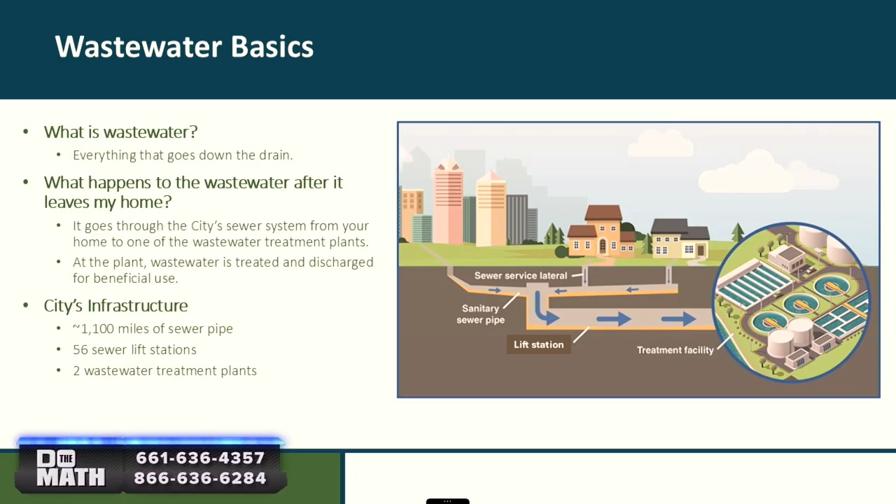All right, so let's go ahead and take a look through them. So understanding the city's sewer system, quick overview just of everything that we do. So as we mentioned, usually people don't think about anything once they use the toilet. So starting off, what is wastewater? Wastewater is everything that makes its way down the drain. So if you brush your teeth, wash some dishes, shower, use the toilet, do a load of laundry, absolutely everything is wastewater. Makes its way down the drain.

So what happens after you do any of those things in your home? We have a sewer collection system. It's a system of pipes underneath our streets that we really don't think about. The City of Bakersfield has over 1,100 miles of sewer pipe. All of that makes up our collection sewer system. So you flush your toilet, it makes its way into the collection sewer system. We try to have wastewater flow by gravity. It's a large volume, it's the easiest thing to do.

Easiest thing, flow by gravity, but eventually it gets to a low point. Every part where it gets to a low point, we have a lift station. Pumps it up to an elevation that once again, it can flow by gravity to the next low point. Wastewater keeps doing this, lift station, high point, low point, all the way until it makes it to one of two treatment plants that the city has. So the city has 1,100 miles of sewer pipe, 56 sewer lift stations, 2 wastewater treatment plants.

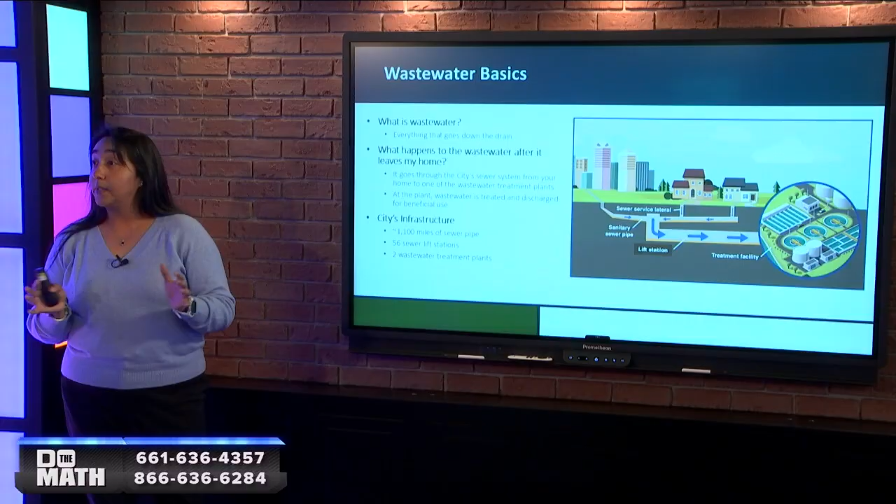One thing to note, it's wastewater, but we also deal with stormwater. Some cities have combined systems where wastewater and stormwater make its way down the same pipes to the same locations. We do not have that. So in addition to the 1,100 miles of sewer pipe, we also have about 1,000 miles of storm drain pipe. And people might get confused about that because we don't have storms here in Kern County a lot, but it's always water runoff. Yes, so we also have that system to look after, but again, we have them separate.

So looking into wastewater basics, what is wastewater treatment? We typically look at two components, the flow, the liquid portion, and the organics or the solids. Treatment in our facilities have a primary, secondary, and tertiary treatment. Primary is basically we're trying to get rid of all, the first step is screenings. There's a lot of things that make its way down the drain that really don't belong there. Plastic products, flushable wipes that really are not flushable.

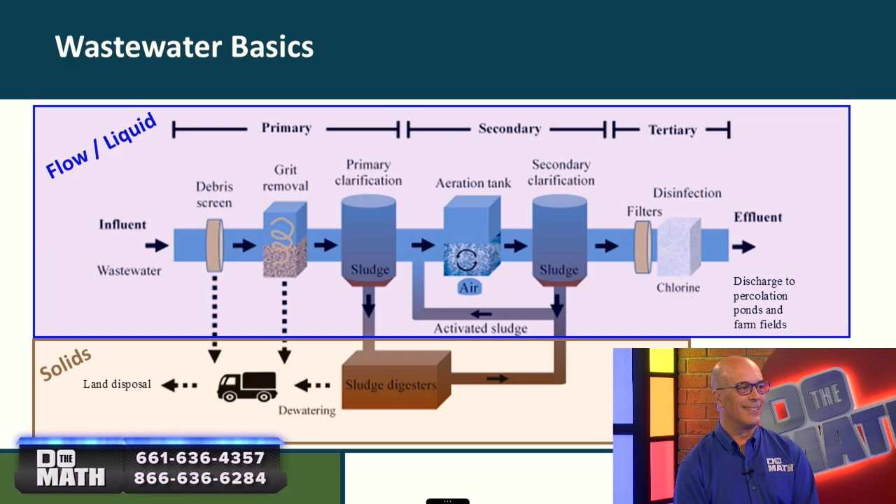Right, and they say on the package, please do not flush, and a lot of businesses also state that. Exactly, and then there's some other random things that make their way down into the storm drains, more through the manholes, but we get tires or blankets or large toys. All of those items we need to get out. Kids have fun when they discover the toilet and drains and what can go down there. Yeah, so all of that we try to screen out at the beginning so it doesn't damage the equipment downstream. Then we go into grit removal. That's more of like eggshells or pieces of sand that make their way.

Can see that on the flow chart that you've got there. Yes. And then we have primary clarification.

This is the first step where we're getting rid of some of the organics that do belong in the system, but they're organics, they're solids, and we are trying to remove them.

From there, aeration tank. This is part of our secondary treatment. It's where we start doing the biological treatment.

Into the secondary clarification tank. So all of the steps really are just, we're trying to separate the solids and the liquids at every step, and increasingly more so. Our tertiary treatment is a final filtration step.

And then there's disinfection. So once it goes through the tertiary treatment, we have now produced reclaimed water, or purple pipes, so it can be used to irrigate landscape at that point.

If we just stop at the secondary, which some of our processes do, it's used to percolate back into the groundwater or for agricultural irrigation. So different types of use.

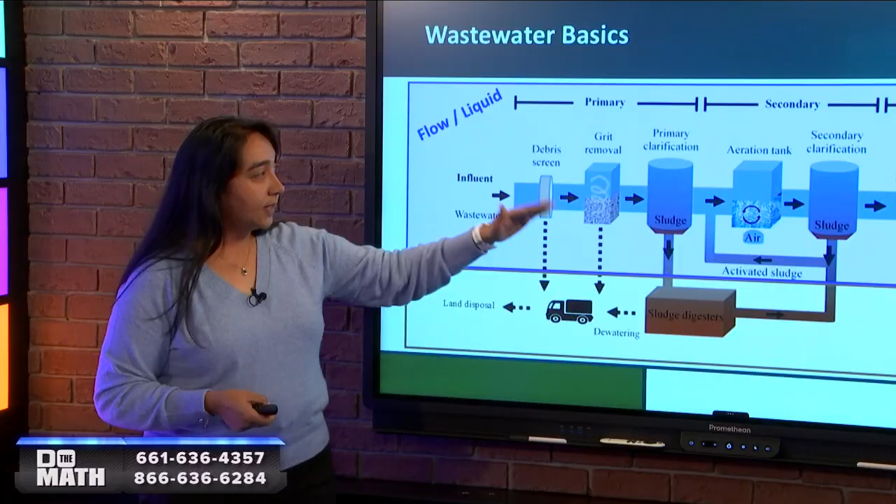And then as we mentioned, the solids - every step we try to separate them out. Our solids go into sludge digesters, which are basically huge concrete structures that get heated up to 100 degrees Fahrenheit and get digested for about 15 to 21 days.

The end product kind of looks like fertilizer at the end, and then it's land applied to city-owned farm fields.

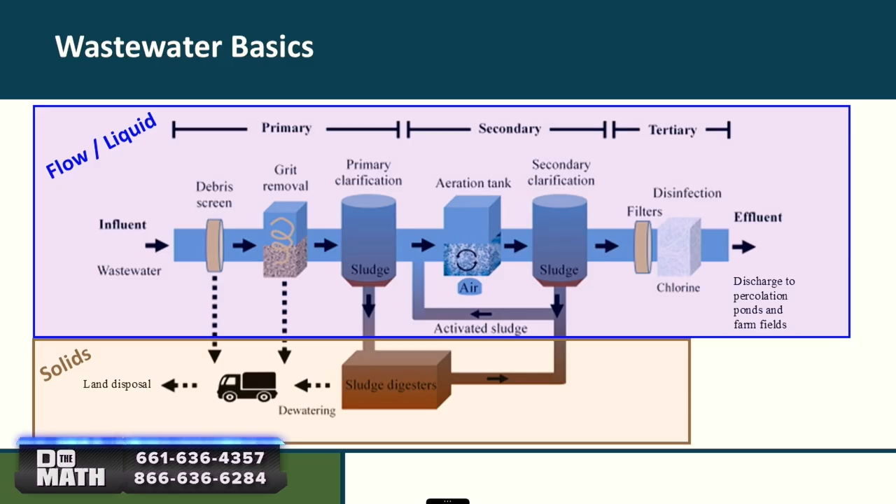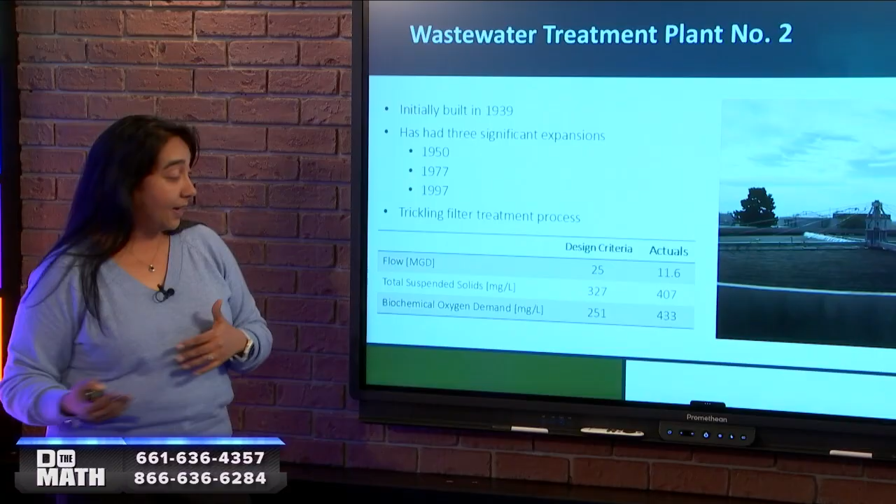Here we're comparing the design criteria, so we try to keep track of the liquid and the organics, or the solids. Flow is designed for 25 MGD, million gallons per day. If you want to visualize that, 1 million gallons of water - picture yourself in the middle of a football field.

Picture that football field with 2.5 feet of water - that is 1 million gallons. And we've got 25 able to go through.

Suspended solids - it was designed for 327 milligrams per liter. Biochemical oxygen demand, 251.

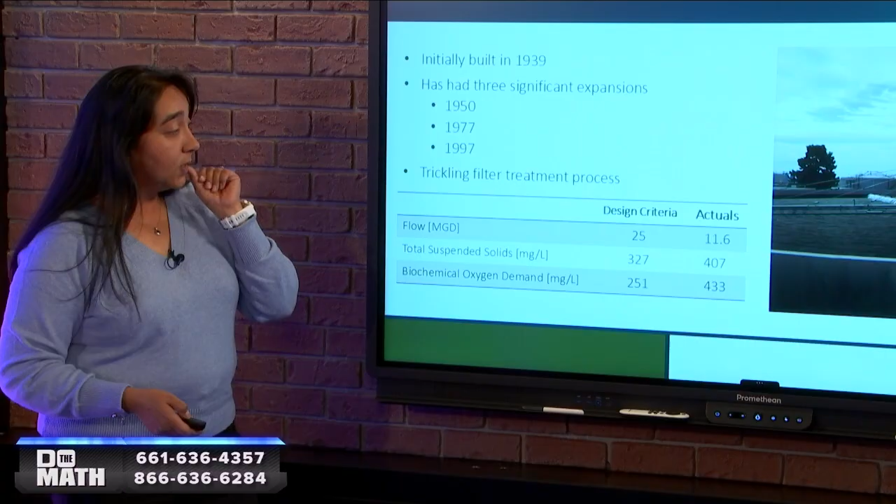Our actuals, we're doing pretty good on flow, but our organics, our solids loading, it's higher than it was designed for. That's part of why things need to be fixed and updated.

We can see if we take a look at the dates when they had expansions, it's been quite a while since the last one. And it usually takes a while between when a technology is developed and when it's implemented.

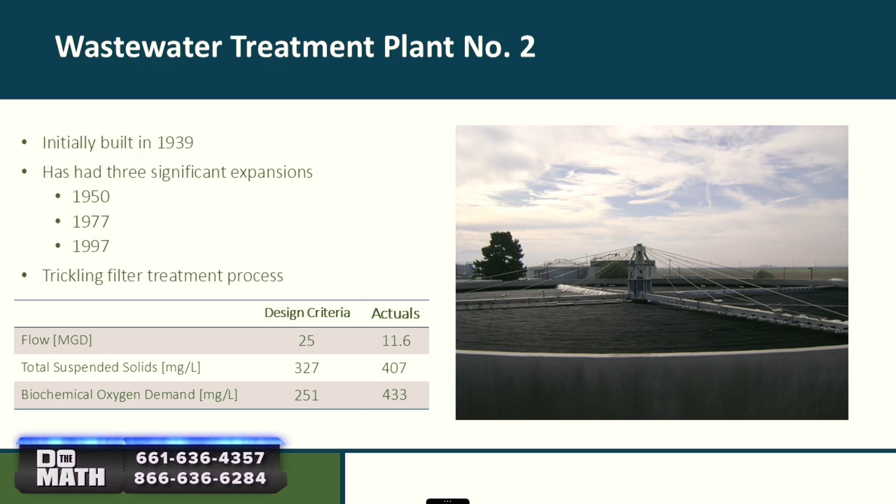So trickling filters were really a high point around the 70s. But as you can see, we went ahead and introduced it in '97, so it was already a little bit behind.

I don't know, you've got this magic touch, Evette. Every time you hit that, we go back in time a little. Is it the touchscreen? Oh my gosh, okay, that's what it is.

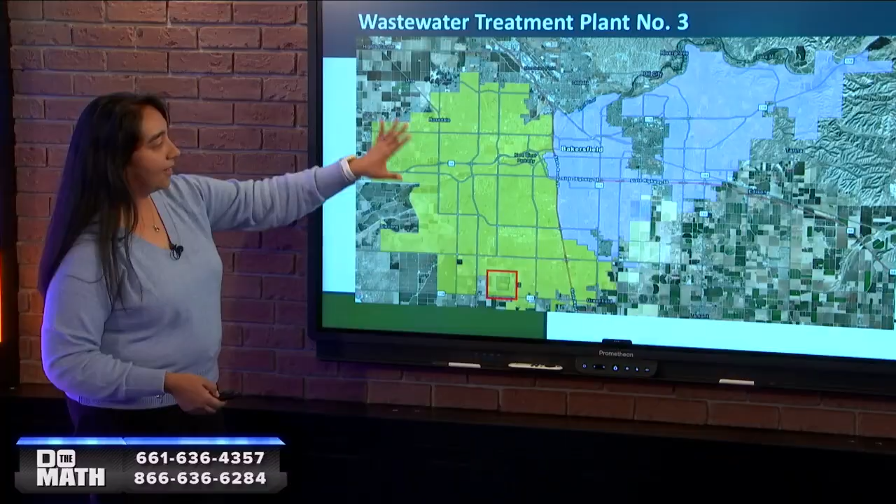So everything flows through. Going on to Plant 3, again this is our service area. Plant 3 is everything on basically the west side of the 99. A little different story with Plant 3.

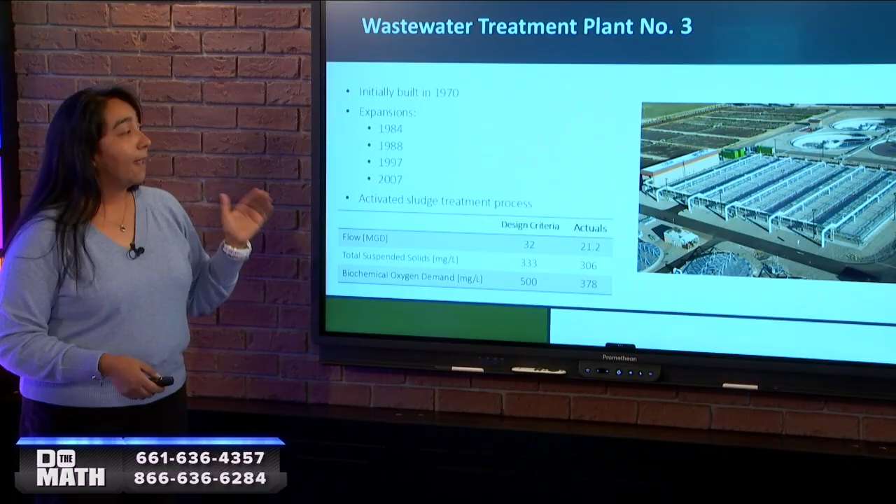It was built in 1970, has had 4 major expansions, the last one being in 2007. Here we have an activated sludge treatment process, so a lot newer technology compared to Plant 2.

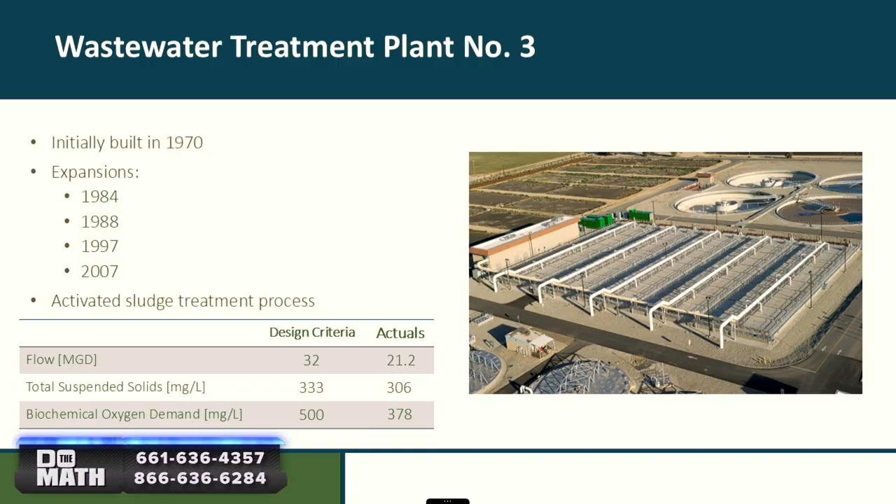You see the design criteria, it's a little larger - 32 MGD with 333 total suspended solids concentration, 500 BOD. So our actuals were pretty good on the solids, but here a different story.

It's the flow that's a bit of a concern. We're at 21.2, which is roughly about 66% of the design capacity.

Once we hit 70% of capacity, we need to really look at an expansion. You don't want to get it past that because that's when problems start happening more.

Okay, and then just a final look. This is a much larger footprint than our Plant 2. You can see this is just the first half of the treatment process, it didn't all really fit into one photo. So that really is sort of a summary of what is wastewater in our treatment process for the City of Bakersfield. Fascinating because a lot of that stuff is going on, and I know it's been in the news pretty recently.

So anyway, Evette, I know that you would love to do a lot of the math problems that go along with that, but I know you brought a colleague in. We're going to have him do some of those to spread the fun a little bit later on. But Evette, thank you for coming in. Thank you so much. We'll be back with more right after this.

In studio, we have Aaron with us, and he's with the Water District also. Thank you for coming on today. Thank you for having me. So what is your role with the Water District? I am the wastewater treatment superintendent, and I'm pretty much in charge of making sure that both of the city's wastewater treatment plants are treating and cleaning the water so that it goes back into the environment.

So Evette talked to us a little bit about that whole process, where they are, what kind of things go into wastewater, what they do with it, how it's treated. But you're the one that makes sure that it all gets done. Correct. And how long have you been doing this? So I've been a wastewater superintendent for almost 3 years, and I've been in wastewater for about 11 or 12 years.

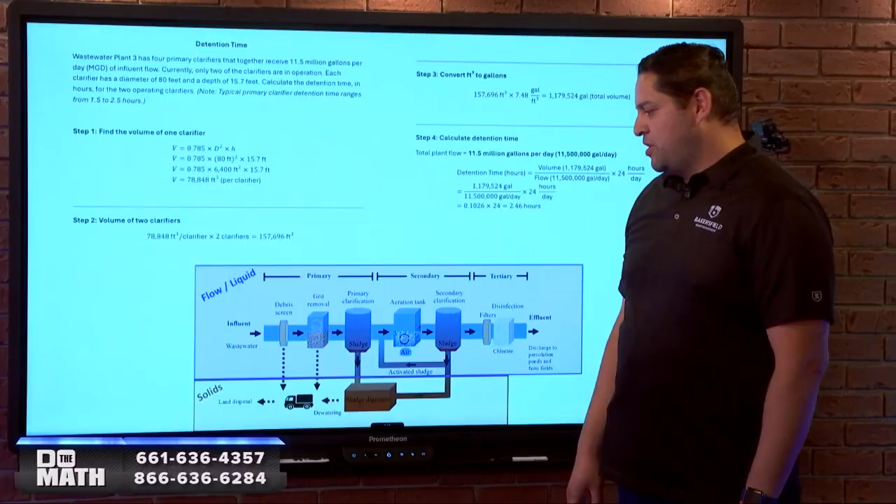Pretty much we have this problem here where we figure out detention time, because in a primary clarifier - this is the flow chart - what we try to do is slow down the water so that it can settle, the heavy material can settle, and the cleaner water can keep going to the next part of the process. Okay, so you're talking about slowing down the water.

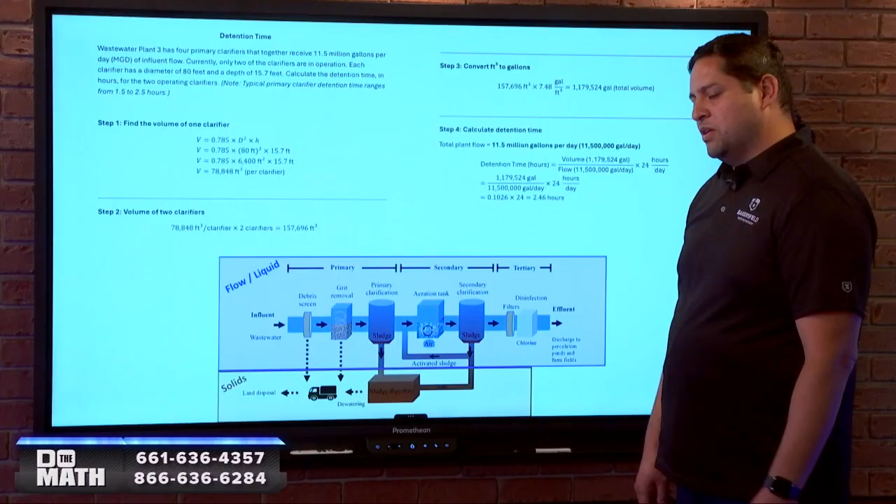So how fast was it going up to that point? Well, it depends on our pumps, but usually in the sewer system it's going about 2 feet per second, and usually we slow it down to about 1 foot per second.

So in this problem, wastewater plant 3 has 4 primary clarifiers that together receive about 11.5 million gallons per day. Currently, only 2 of the clarifiers are in operation. Each clarifier has a diameter of 80 feet and a depth of 15.7 feet. So to calculate the detention time, we're only going to do it for 2 clarifiers, since that's what we're using. Just a quick note: a typical primary clarifier detention time ranges from 1.5 hours to 2.5 hours.

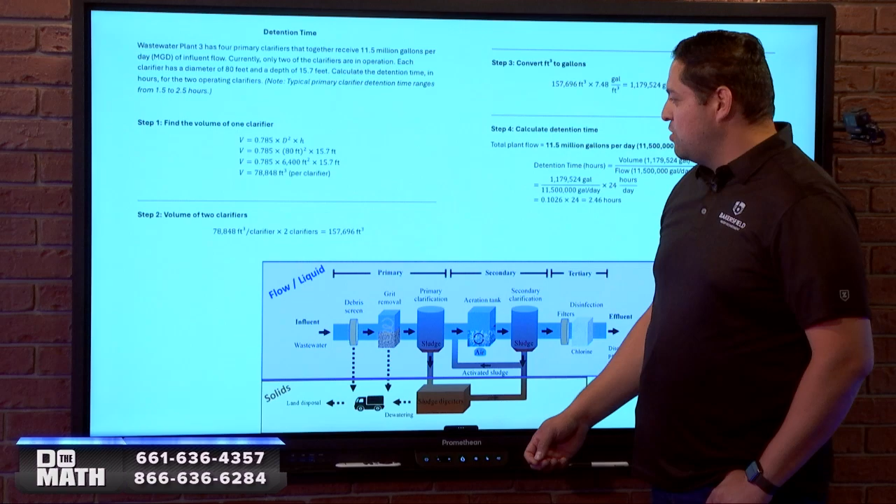So the first thing we have to do is figure out the volume. To figure out the volume, we take the constant 0.785, which comes from pi r squared - since we get diameter in most of our specs, we use 0.785. Then we multiply that times our diameter squared times our height. So if we multiply 0.785 times 80 feet, our diameter, and square that, and also multiply it times the height or depth of the clarifier, we get 78,848 cubic feet per clarifier.

Okay, and we can see because it's a cylinder shape. Right, and 2 of the numbers are already given to you in the problem. You've got the 80 feet for the diameter and the depth of 15.7 feet. And then you're just using that other number you got from pi, multiplying all of those according to the formula to come up with the final volume.

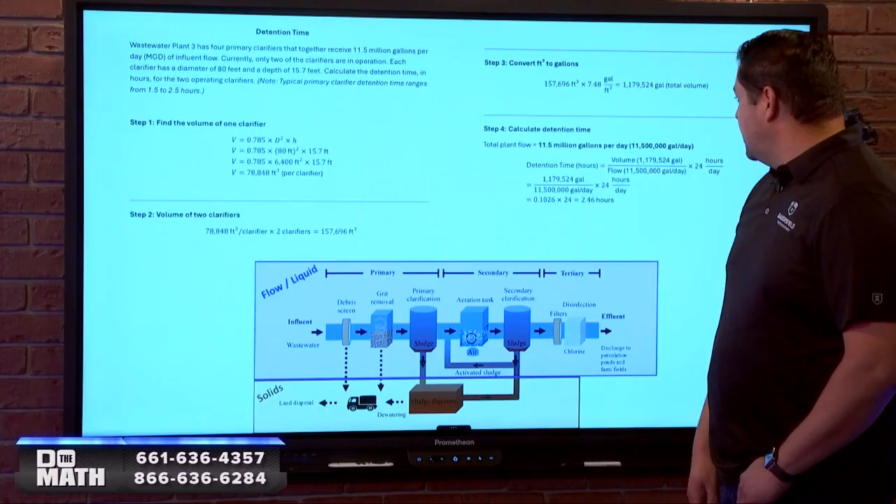Correct. Since we have 2 clarifiers, we're going to multiply our cubic feet by 2, which will give us 157,696 cubic feet. And that's cubic feet, so we need gallons of water.

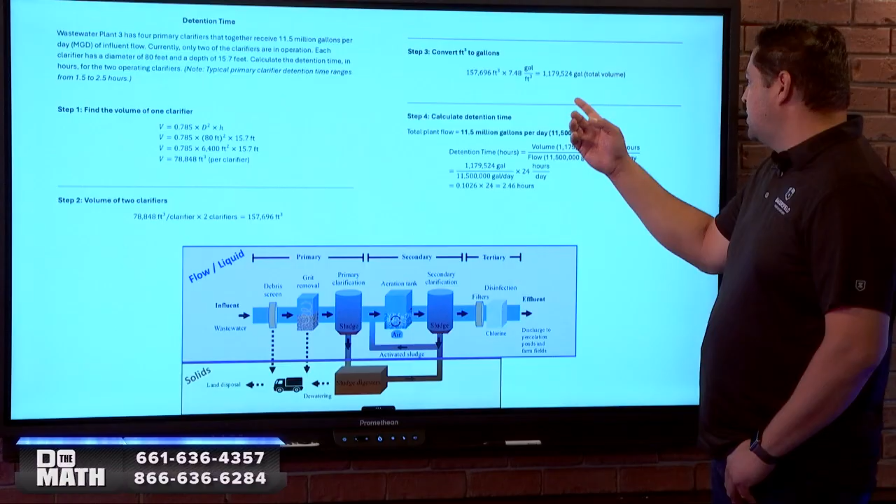So in order to convert it, there's 7.48 gallons of water in 1 cubic foot. So we'll multiply the cubic feet times the 7.48 gallons per cubic foot, which would give us a volume of 1,179,524 gallons.

So then we can plug that into our detention time formula, which is volume divided by flow. We'll have 1,179,524 gallons of volume in the clarifier, and our flow coming into the plant, or to those clarifiers, we'll divide by 11.5 million gallons per day, and multiply it by 24 hours per day to get it in hours. So if we do all that, we end up with 2.46 hours.

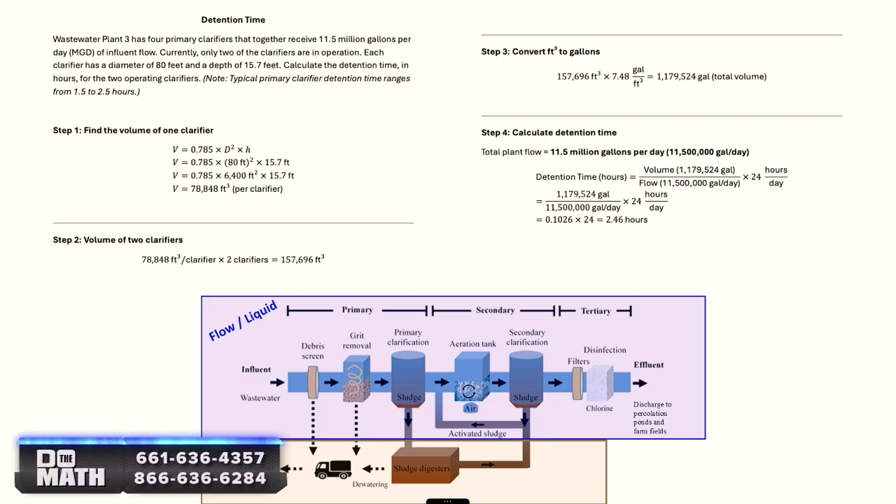And that falls in between the detention time ranges.

A lot of times that's one of the parts I think a lot of students get confused with - how do I get it from cubic feet to gallons? But that's what step 3 is showing right there, converting that. Nicely done.

So we can see down on the flow chart again, the clarifiers, and those are the cylinders, which is why we need to figure out the volume of those, and that's the formula for doing those.

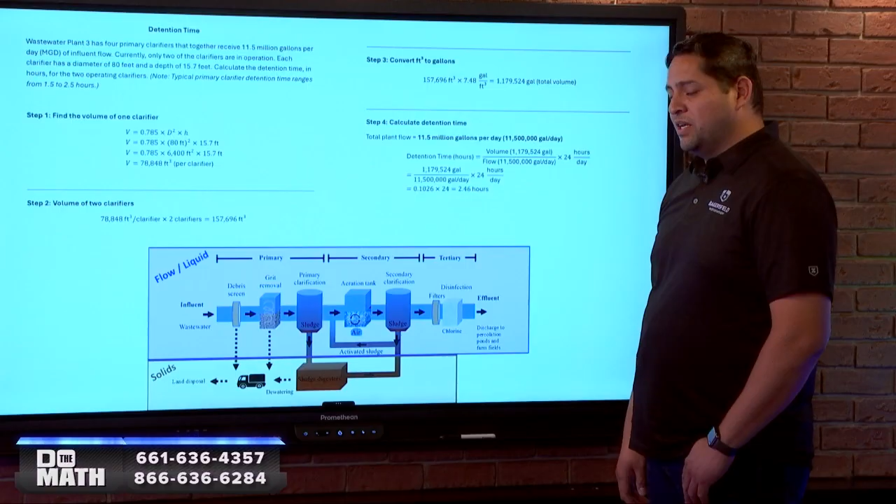Just by slowing down the water, you remove like 90 to 95% of the settleable solids, and about half of the suspended solids, which are the solids that don't settle, and about half or a third of the organic material. So just by slowing down the water, you get a lot cleaner water to go into the next process.

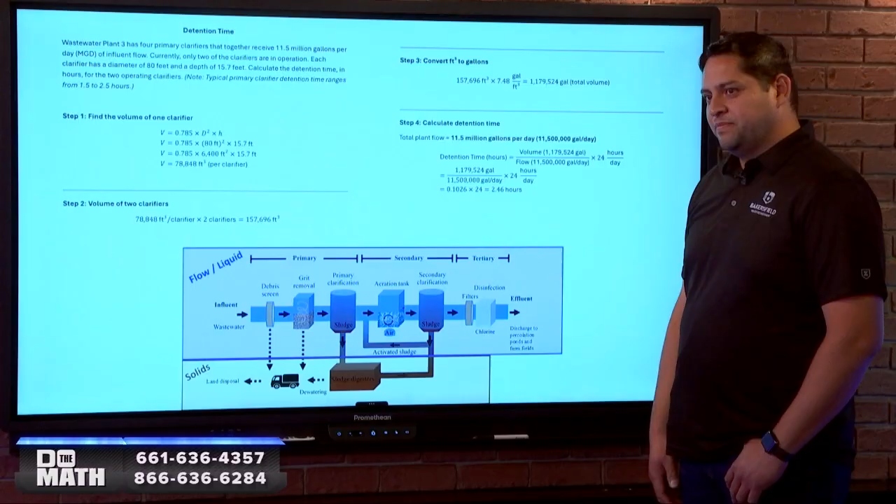Well, Aaron, come on back over here. That was a great explanation of some of the math behind treating that water right there. Now, as far as, because you guys have been in the news a lot, tell us a little bit about the expansion that's going on.

Well, the expansion - both of our plants, or plant 2, have a lot of aging infrastructure, so that one kind of needs an upgrade. The expansion would be for plant 3, which is getting close - it's about 75% of its capacity. So at that point, we have to start planning to expand so that we can treat that flow.

Right, because you don't want more than 75%. Well, by the time you get done with expansion, you're going to be up there at 100%. And that's why you need to be doing that, correct? Yeah.

If somebody wanted to know a little bit more, they can go to the city website - Bakersfield City.us. All right, so it's up on the board right there, so we can see that.

So there's times people go, hey, what's the phone number for Do the Math? And after being here for almost 25 years, sometimes I'm like, I know it's 636, something like that. But anyway, Aaron, thank you very much for coming in, Brian. A little bit about the math right there and wastewater and things like that. We'll be back with more right after this.